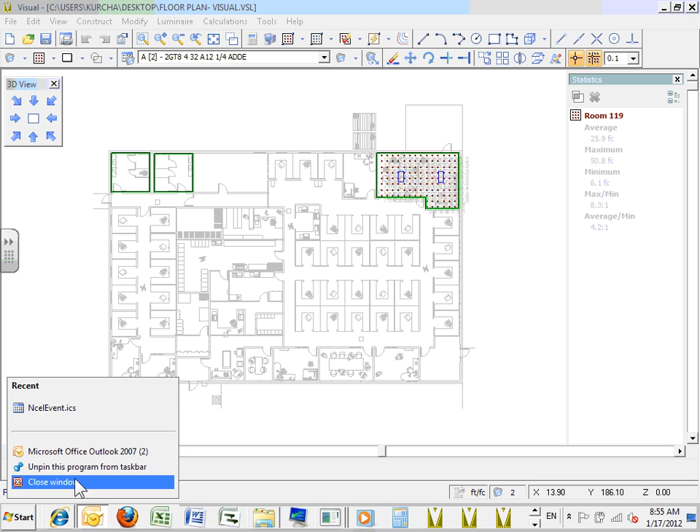So with this, Andrew, if you say a few things about Davis and Associates, go ahead and start. Yeah, we're a manufacturer's lighting representative. So when people are designing these jobs, we have guys that'll go out to engineers and other specifiers. They specify a product and it ends up on these jobs. I've been working there for like 5 years, mainly just doing visuals. So it kind of gets a little dry. But we got salesmen, we got guys that pull jobs, and we got guys that do what I do. And then next week Jeff will talk to you guys about lighting controls, and that should be a little better. This will be kind of dry.

Are you considered a lighting distributor or supplier? We're a representative, and then we have distribution, like your Border States, your Graybar. Oh, you're a manufacturer's representative? How long has Davis been in business? I think he started it in '69. He started out by himself, our boss, and then grew it over the years, and now we've got like 20 some people. Are you guys in Eden Prairie? Right down on Flying Cloud.

It sounds like you guys already got a pretty good head start on this. You guys have all your rooms done already? No? Yes? Some of them. I guess, Chad, you wanted to look at doing a Lumen method on a bathroom? Yeah, if we can take the bathroom and do a Lumen method. Sure. As I told you guys, there's a much easier way. If you have a floor plan, you can just draw the room like you did and add the calc zone like you did in your lunchroom. But the Lumen method is more for if you don't have a floor plan and I'm calcing a bunch of 30 by 30 classrooms. I could use that, and it's just under tools, interior lighting.

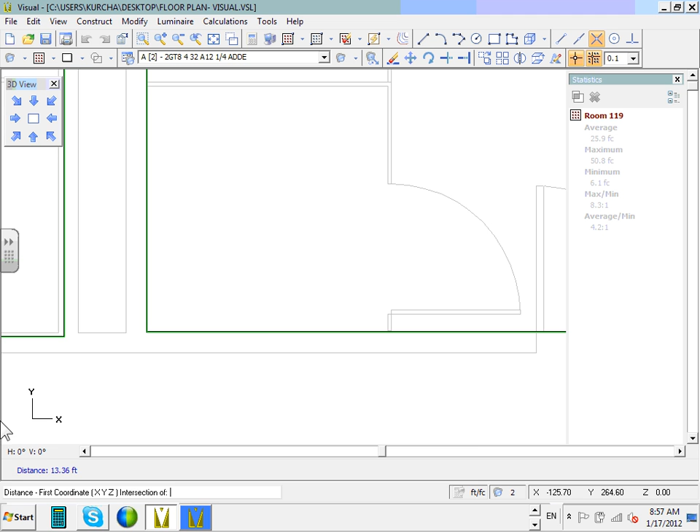Well, hold on. I'm gonna grab the dimensions of your bathroom here. Yeah, for Lumen method, you need to know the dimensions of the room. Can you slow down when you get the dimension so we can follow? Yeah. I just hit Shift D, and that gives you a tool to check your dimension. So we got 13.36 that way by 13.5.

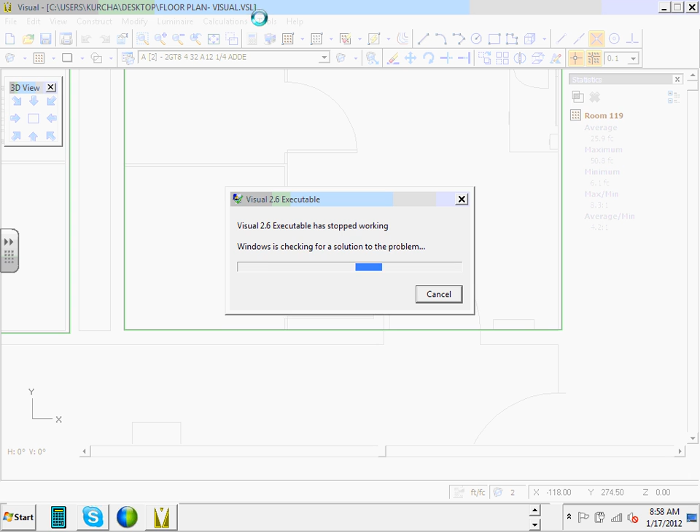So then we can go up to this. It's going to be kind of different for you. Oh, it's right here. Uh-oh. Yeah, I think that's what was going on. Did you do anything? What are we doing so far? Cancel. Just cancel everything out. It's right there. Okay. We're going to try that again.

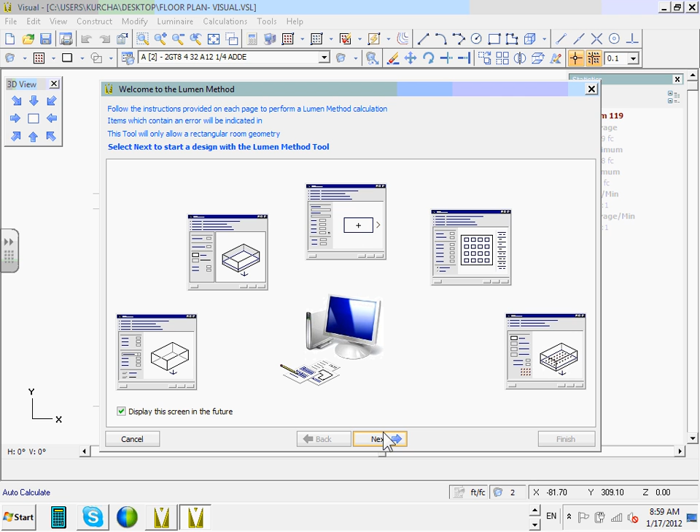And if you guys look at where Andrew went, there's Tools, Distance. That's where you pick up the distance if you don't want to use Shift D. All you need is the length and the width of your room, and the height, before you start this. So if you can share what you had with them. The height will just be 10. I took the distance, I had like 13.3 by 13.5. So then you just come in here.

This is helpful if you're doing a school or something, where you got a bunch of rooms that are all the same size, and you just want to draw one, and then you could just copy it rather than drawing 30 rooms. So go under Tools, and then it says Interior Lighting. Right there.

Guys, yeah, right there. When you do the Lumen method, can I say just this little thing? When you do the Lumen method, it opens two windows for you at the bottom here. Be very careful, a lot of disciplines get confused. When you hit the Lumen method, it opens another window right here at the bottom, and you have to click on it in order to get the Lumen method. You see, well, I don't see anything, because you have to click on another icon right here to get you the Lumen method. That's a very common mistake.

Where is it, Chad? Okay? Everybody get that one? Can I have thumbs up, thumbs down? Up there in the back? Cool? Okay. So the dimension that we're going to use is 13.3 and 13.5. This is the bathroom. And the height is 10. Height's 10? Yeah. So you get your 10 there.

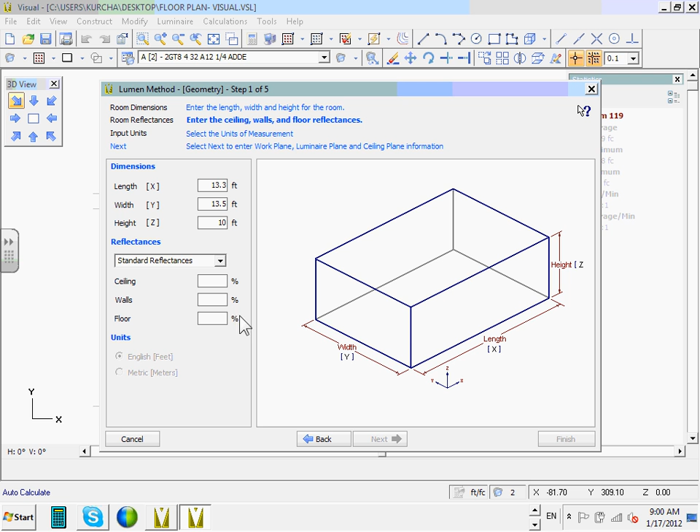And then down here, you're going to have reflectances. So we'll just use a standard. They have commercial, light industrial, heavy industrial. Kind of like a dirty warehouse that has big machines running, you're obviously going to use the heavy. Commercial would be, I guess, kind of like this. You got white walls, white ceiling. That would be your more typical. You can enter in your own values too if you want.

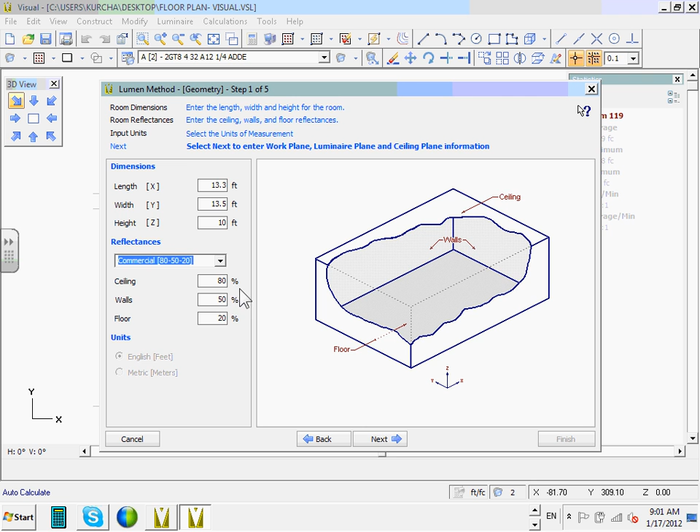Everybody's at this point, guys, before we go further? Yes? Are you guys there? Ashley, you guys are good? Dustin? Okay.

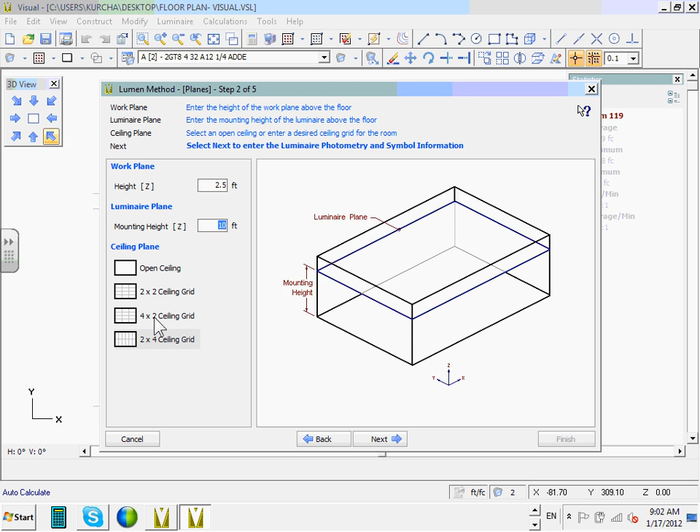We usually always measure at 30 inches. That's about where your desk is. So you're just going to leave that at 2.5 feet, your work plane. 2.5 feet, 30 inches. Mounting height. This gives you the option of mounting height here. We're going to be using a recessed fixture, I'm assuming. Yep. So if you were using a hanging fixture, we'd enter a different value here. If you want, you can add a grid to it. You don't have to. It just kind of makes your drawing more cluttered. I like to just leave it open.

So this will be the fun part. We identified the fixture for you, so we know exactly what fixture it is. This is bathroom 13, is it? 13 and 14? Yep. Page 36. Page 36, here's the fixture that we're using right here. So this is page 36, guys, the fixture that we're going to be using. You have the manual, guys, page 36. It's a recessed Lithonia, right?

Yep, it's a Lithonia. Okay, if I can have your attention, guys, for one second. When you click on this little icon that my friend Andrew is going to click on, this will take you to the IES file, exactly like when we were loading fixtures. Remember how we loaded the fixture? If you click on it, it takes you all the way back to the last location that you were in. So you're going to go back a little bit to Acuity Brands. Okay, so everybody's at Acuity Brands, guys.

And then from there, it's a Lithonia fixture. We'll go to Lithonia. Commercial, industrial, fluorescent, I believe. Yeah, that'd be correct. And these are all, you guys have to read it, from the catalog book that we have. Okay? And it's going to be recessed. On the side, it says recessed. I walked them through how to read it from here. So, recessed. Everybody's there, guys, to get that fixture.

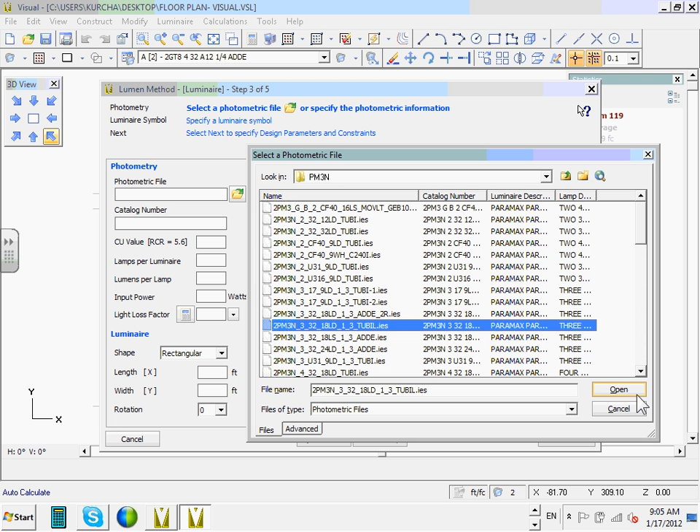And what I told them, Andrew, is just follow the catalog number here if you don't want to mess around with the type of fixture and so forth. Just use the example. Okay, so we're going to use a 3 lamp, it looks like. So from there, you guys use the same example in Lithonia. If you don't have the Lithonia book open, you have an example of a catalog number for you. It gives you an example, that's going to be the most basic common denominator fixture. If you can enlarge it for them so they can see it. This thing here. Yeah, drag it, there you go.

It's page 36 in the book, guys. 1, 2, 3, 4, 5, 6, 7, 8, 9, 10, the 11th from the top. That helps, right? Almost, it's a 2PM3, 3 lamps, 32 watt T8 lamp, typical.

Thumbs up, everybody there? If you made the wrong one, you can correct it anytime, guys. Anybody need help? We'll wait a few seconds. Do you mind, Andrew? Yeah, we use it all the time, so we're fast. Anybody need help to identify a fixture? I can help you.

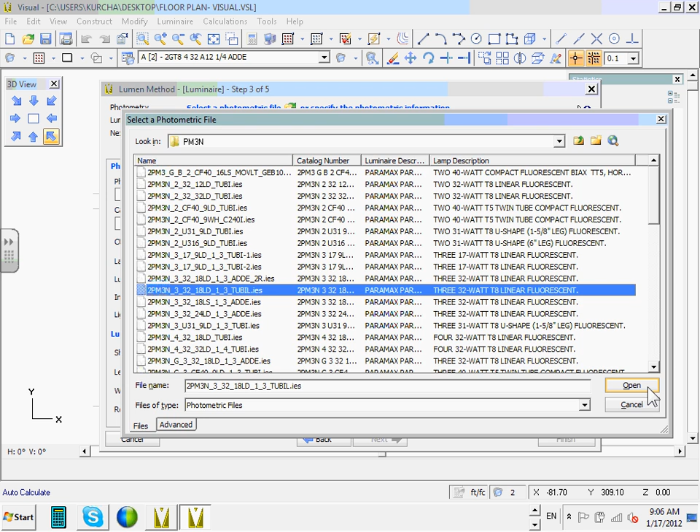You guys got it? If you've got the wrong one, don't worry about it, we can change it at any time. That fixture, okay, load the IES file, we're gonna open that, and it brings it in here.

So what you have done, when we did the lighting schedule and pulled the IES file into the schedule, that step takes the place of pulling the IES file into the schedule. Now you have a fixture with the data inside, and it'll be on your schedule now too.

So you've got to assign a light loss factor. We assigned 0.81 for the fluorescent. That's a good number, let's just use 0.81. Everybody got the 0.81 for the light loss factor?

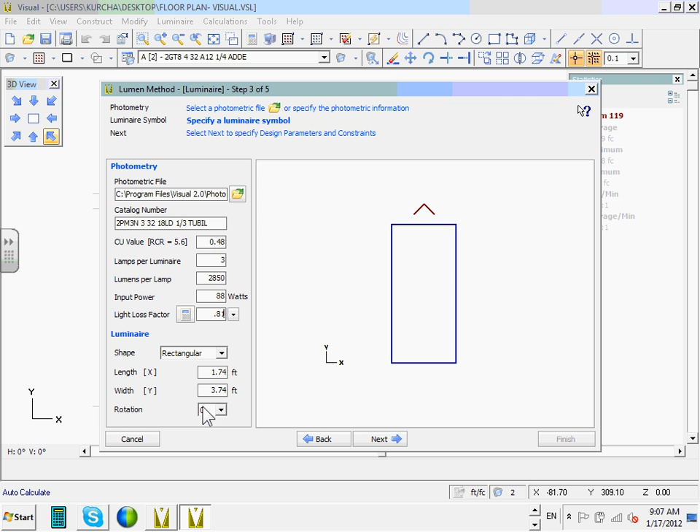Do you guys remember on the schedule we picked up the light loss factor? And I know, Phil, you had one and you got so much foot candle. We might have to come back and change our rotation, it shouldn't make too big a difference. But once you hit next, so we were there, just hit next.

It'll bring you to this here. The foot candle is given for the bathroom, 20 foot candles for restroom 113, 114. So you just type in 20 here.

Now it's going to give you 1, which I guess that's okay. It's probably going to want to use 2 in your bathroom just because you've got stalls and you want to be able to see what you're doing in there. But we'll go with 1 just for the study here.

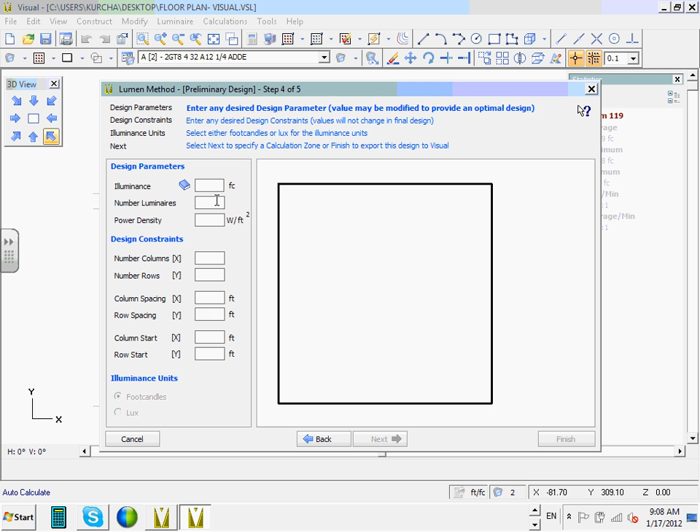Fill out anything on the left before you? No, what you can do here is either type in a value for 20, or if I know I'm going to use 2 luminaires and I want to know what kind of levels that'll give me, I can just type in 2. That's to meet the code - if you have to meet an energy code, you can type in a power density and it'll tell you how many of that fixture you can use to still be within the means.

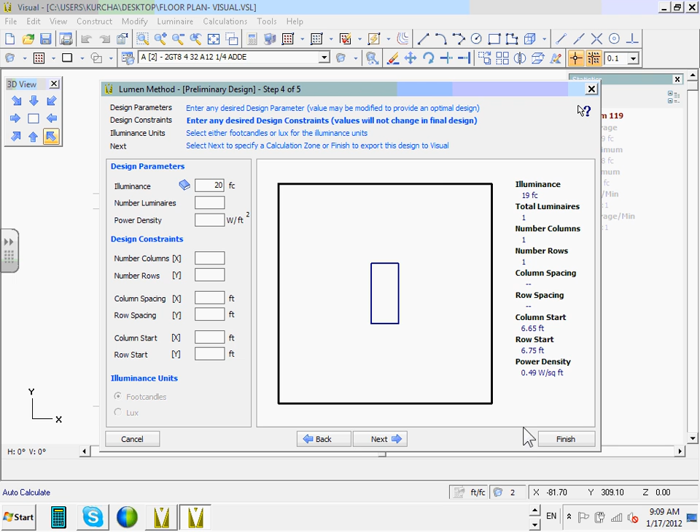We'll just use 20, we'll just use 1 and go to next. Then it gives you the option of making a calc zone, which the only thing I don't like is it doesn't let you label it in here, so it's just going to say calc zone number whatever. But 2 by 2 is going to be your spacing - that's putting a point every 2 feet, and that's where they're taking readings.

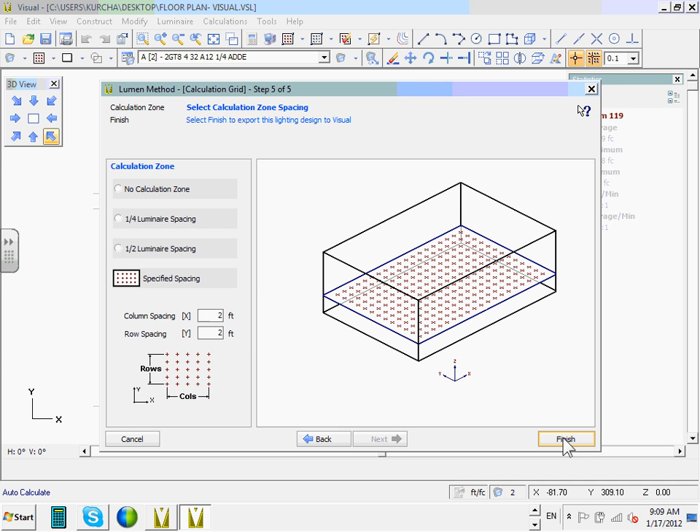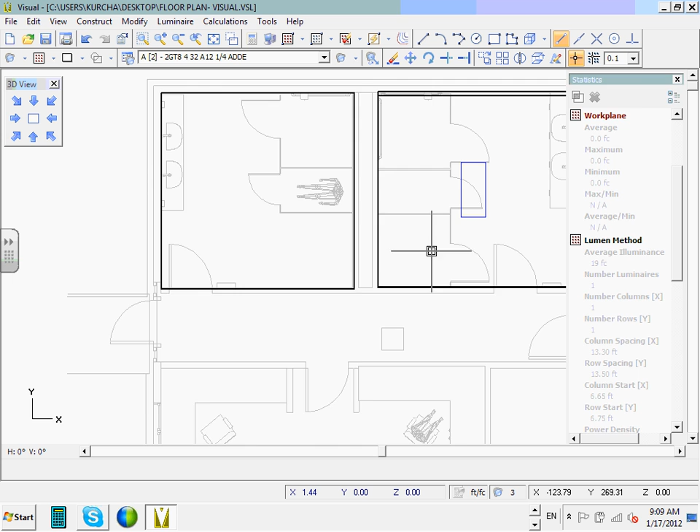And then from here you can hit finish. You can see it, he's holding it in his hand - that's the calculation you've done. You just go drop it right to the top. I'm just going to turn my endpoint on so I can select this corner down here, and then you've got to click again, right or left - just 2 left clicks. Just click once in the corner and then make sure it doesn't rotate on you, and then it should be good.

So you can lay the Lumen method - well, right now we did the foot candle method, where we did the Lumen, and then you got to add this calc zone separately. That way's probably more practical when you have a floor plan.

Sometimes you won't have a floor plan, you just get dimensions, and that's where I use that a little more. Or like I say, if I had 30 classrooms all the same size, I could draw one. So you're kind of doing more test areas with fixtures inside, different fixtures. Exactly, it's just kind of a way to see what you're going to need to meet all these levels you guys have to do.

Andrew, can you copy room spaces? Let's say we've got this bathroom here. I think they're the same size. You just right click here, it's copy. You gotta select the whole thing like that, and it'll copy the whole entire thing, and then you can bring it over and copy it. The only thing is when you start doing that, it just does this - you'll have a hard time knowing which area is what.

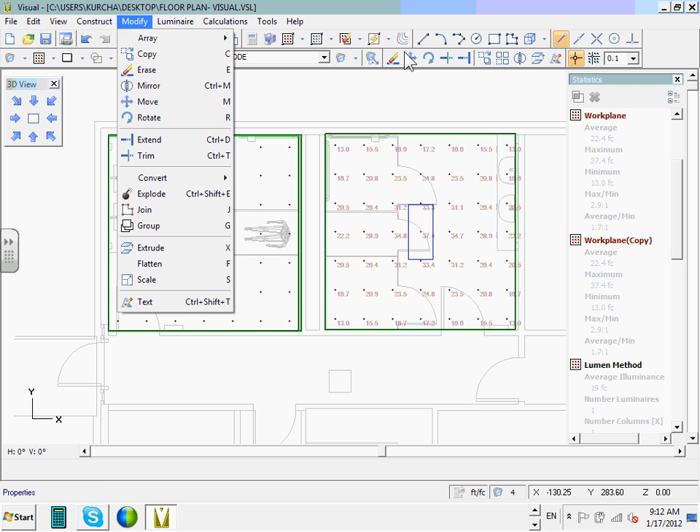I'll get rid of this one just for no confusion. Feel free to leave the other box too, so we can calculate it. Doesn't matter either way.

We're gonna go to edit properties and just select a point - just left click on any point here. It'll turn red, and then if you just right click, it'll open up a menu here.

If we do this for every room, they're all just gonna say work plane - it's gonna be really confusing. Now, I don't know, this is bathroom, probably 114. What's the female one? You guys have them printed here? The one that you did is bathroom 114. Okay, you guys see what my friend Andrew's doing?

When we drop that big box with calculation, the drawback of this method is it doesn't label the box or the calculation zone. So what you need to do when you drop it is go to the property, pick the calculation zone, right click on it and name it, so you can see which calculation zone you're talking about.

And the same thing with the solid, right Andrew? You can pick it and name the solid. That's not as important as naming your calc zone, but I asked them to do it. Yeah, that does it when you draw it, but we can go back and label that if we wanted to.

Okay, so we did - what'd you say, 114? You see what Andrew did? Pick the calculation zone and rename it. What he did is the property that we did here. Picked it up - I wasn't sure.

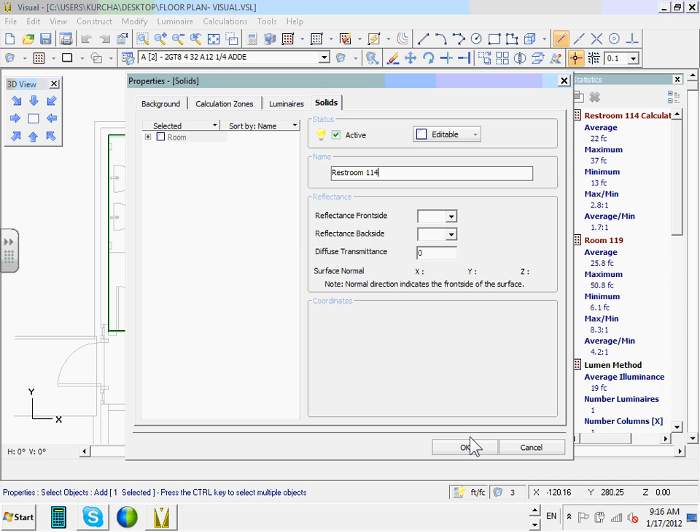Now can you guys give me a thumbs up that everybody was able to drop that box Andrew did and rename the calculation zone and the solid? Can I have thumbs up, thumbs down, Ashley, Jackson, my friend? The solid, same thing - go property, select solid, right click on it, it says room, name that room as bathroom 114, hit OK. Now the solid, the box, and the calculation zone have the same name. Cool - one thing about the granularity of the calculation...

It's 2 by 2. You can also change that if you go to edit properties and just select one of these points. Then right click, and it tells you your row spacing and column spacing. What does yours say? You can change it there. Good, 2 by 2 will be fine.

My friend, you guys are good? Yeah. And Dustin, I lost my wheel. It was working earlier though. Oh, let's see if it's in options.

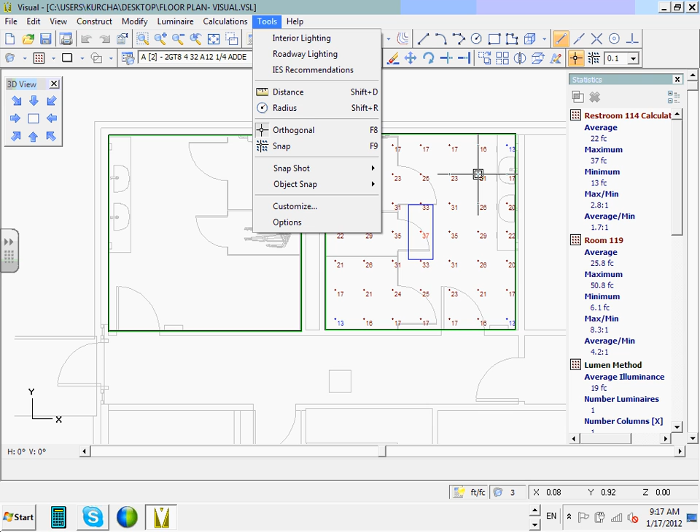There's no fixture. You just need to copy this fixture and drop it on the other side. Come in, go to tools, and then options. You got this window here, just click on the drawing aids tab.

Are all 3 of those boxes checked, like on here? Does it work? Does it? Awesome.

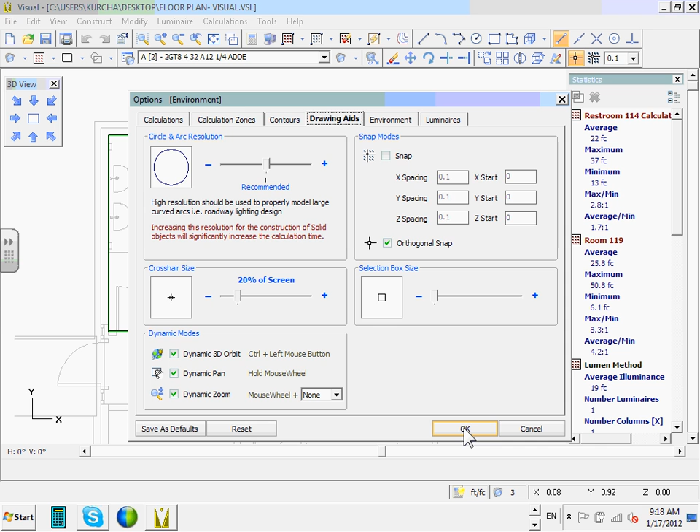And when I changed it, it shrunk to a 2 by 2, and a bunch of 2 by 2s with a big wide space around the outside. Maybe your box was smaller than that.

Any question, guys? Everybody drop that one? Can I get thumbs up, guys? Right? This is so easy.

If you have a square or rectangle, you can choose the dimension, go grab it, drop it. But when you drop it, the first thing you do is rename the calculation zone and the solid, and you're done. Now, if your area is not a complete square, then you have to use your memory.

Oh okay, that's easy, very easy, very fast. And that makes it go faster. Only if it's square or close to square, for example, see that room there? I can ignore that little room. And then all the room, for example, if you look at this room here, the kitchen, you can ignore that little room here, right?

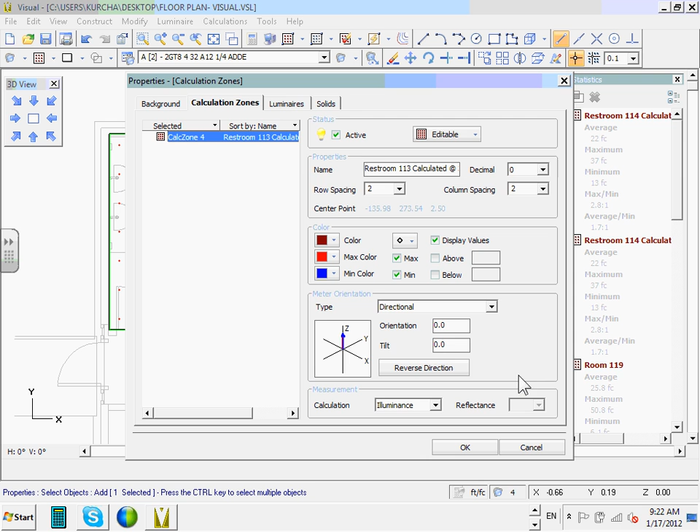Call it male bathroom. I'm just calling this one 113. Absolutely, yeah. So that will expedite the process for you, instead of, if the two rooms are the same fixture, the same dimension, the same calculation, there's no need to redo them. You just copy and paste it.

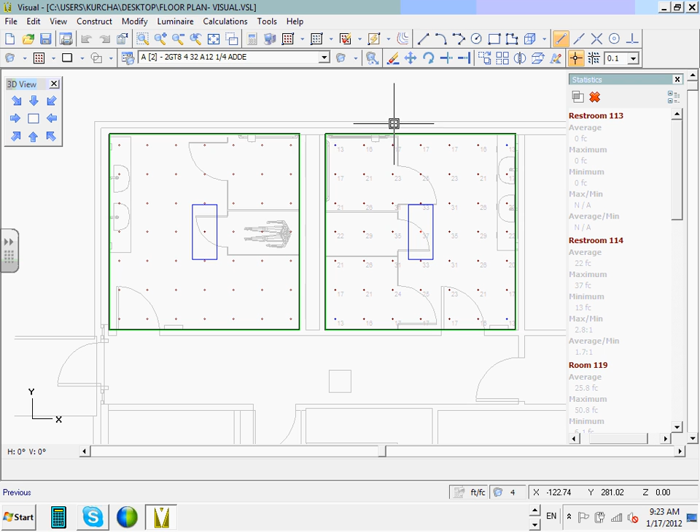So will it copy the calculation as well, or do you have to do a recalculation? It'll copy it, but anytime you move something, all your points are going to go back to nothing. So you have to recalculate every time you move a fixture, draw a new room, or copy one. Can you hit that again? Did you guys hear Andrew? Every time you move something in the system, you have to recalculate to get the numbers. That's okay.

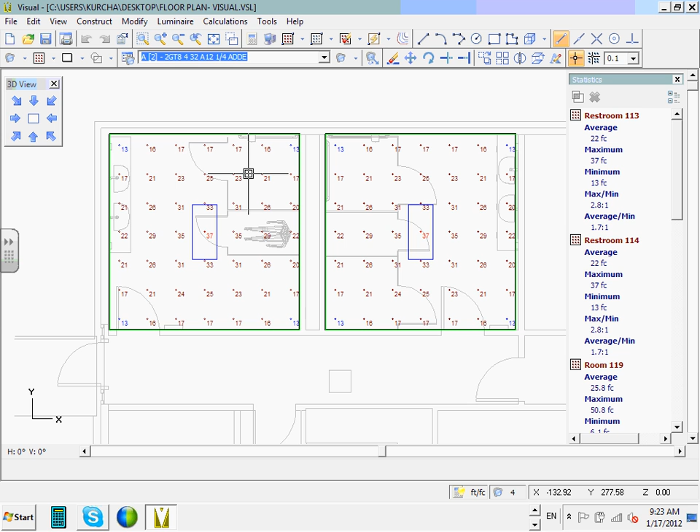Any questions, guys, about using the Lumen method to get a box, a calculation zone, and a fixture, and then drop it right at the top of where you need it to be, and then copy it if you have an identical location like it? So we can use another office, just to show something different.

Well, when we did the Lumen method, the fixture we selected will automatically be put in your schedule. It labels it LM-1. If we do another Lumen method, it's going to label that fixture LM-2. If you want to rename this fixture, it will matter for the lighting schedule, because your lighting schedule is going to label alphabetically A, B, C, D. So we'll just label it B for now. Yeah.

Okay. So you want to look at a different room? There's one in the conference room, with direct and indirect light and all this good stuff. Maybe after we do the room box. This here? Yep. I can help you with that one. This is the conference room. 123 or 125? It's actually conference room 123, and page 230.

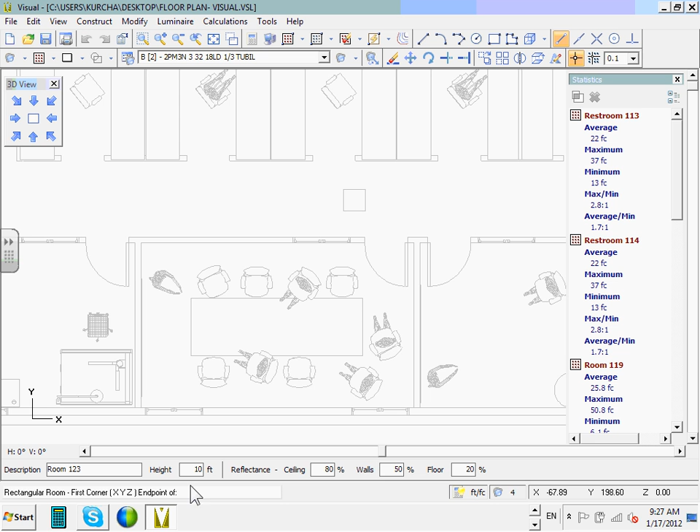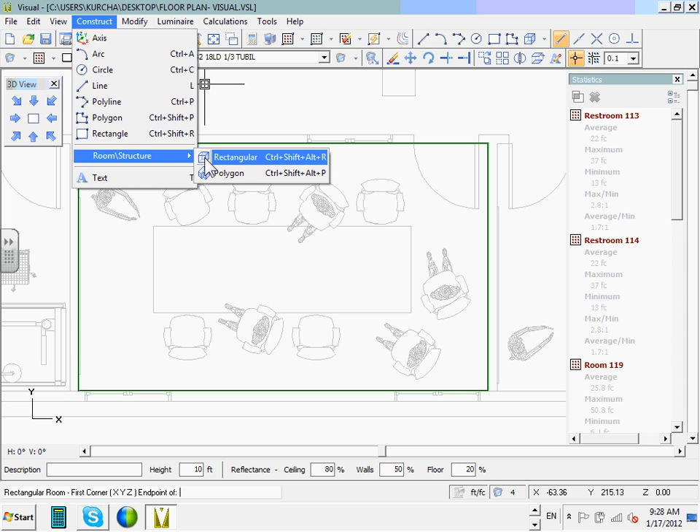And we got our room. Everybody needs help, guys? Construct a room and name it room 123 or conference room 123. You're naming it, do you have to name it before you highlight it or after? Doesn't matter. Just once you come in here and select rectangular, okay, you can name it now. And then you can either click on the screen and it'll give you your cursor back, or you can click in here.

Everybody has a room, guys, right? Phil and Rob, you guys are good? Jackson, you have a room? And named it conference, Ashley? Justin? Chris? You work on that?

Okay. So now we got to add this fixture we're going to use to our schedule. So come into your schedule. The fixture that we're using, I don't know if you can tell them the page number. Yeah, the next fixture you're using is on page 176. 176, guys. So we're gonna come back to Acuity Brands Lighting again. And it's different here. Okay.

And this fixture on 176 is a Peerless. Everybody got that one, guys? It's different than the other one. It's a different manufacturer, right? Yep. Peerless lighting. No, we're doing the regular one. Number 5. This is the Sarah 7. And you're supposed to use a direct indirect. So we're going to try to use the 7 CRM3, which, if you're on the page, you can see it's the third one down. It's got a little bit of direct light.

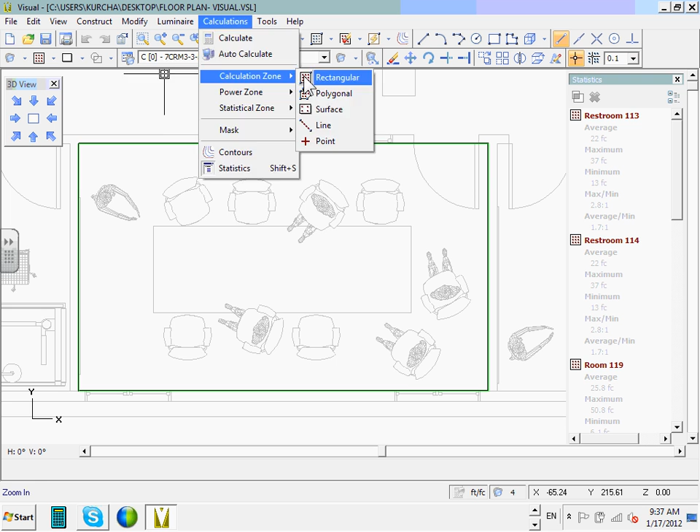We need to add a calc zone to this room after you get your fixture in here. And we'll do a rectangular. So now we can name it. This is conference room 123. And you'll have to put in 2.5 there. So it'll put it at 30 inches.

Select each corner and leave it on there, instead of 2 by 2. Or you want 2 by 2 where it says height, or 2.5 where it said height there on your calculation. So you got 2.5 on the height. And then your row spacing and column spacing will be 2.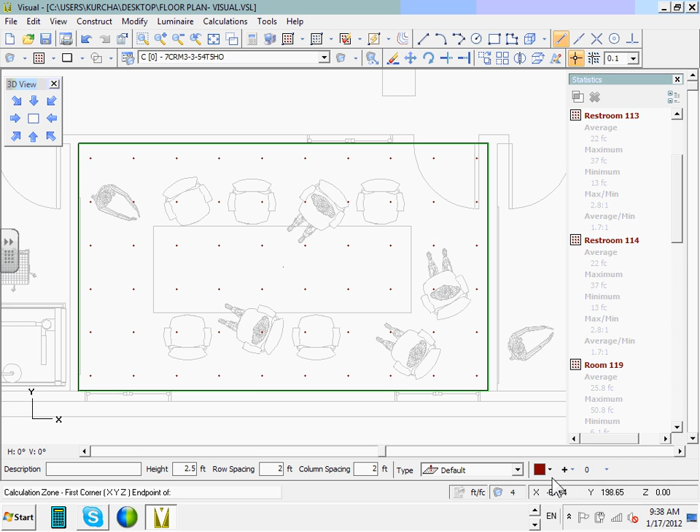If you guys notice what Andrew did is he used a calculation zone. We use the surface because we have a surface. Either way will work perfect, guys. Either calculation zone or surface, and it works. That's fine. Just preference. Yep.

Absolutely. And then we gotta place our fixtures in here now. We'll use a 24-inch suspension, so we'll put this fixture at 8 feet since we have a 10-foot ceiling. We need to rotate that fixture so it goes with the table. I'm assuming that's the way you want it. Turn that off. And center it over the table best you can. And then looks like we'll copy 3 of these.

You can see you got it on your schedule. You hit that drop down, and then you can select A, B, or C. And then there's a little button right next to where that drop down was. I don't know what it looks like. Blue dot. And that'll let you place it. And you have to change your mounting height to 8. Turn it 90 degrees.

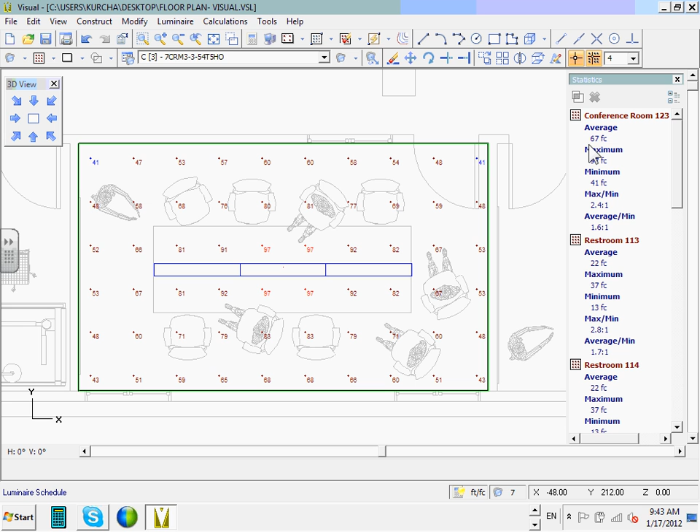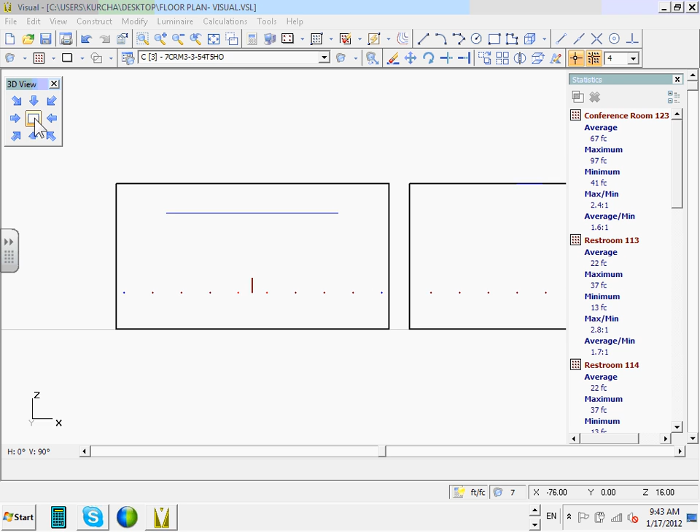Any question, guys, about direct? Make sure the fixtures that you have done are mounted at 8 foot. So if you go property and check the height, you can zoom box them all in. Right click. And then the height, yep, mounting height is 8. Make sure their mounting height is 8 because the ceiling is 10, so the direct light shoots up and down. What happened in the past, people will mount them at 10. Then you don't get a whole lot of light.

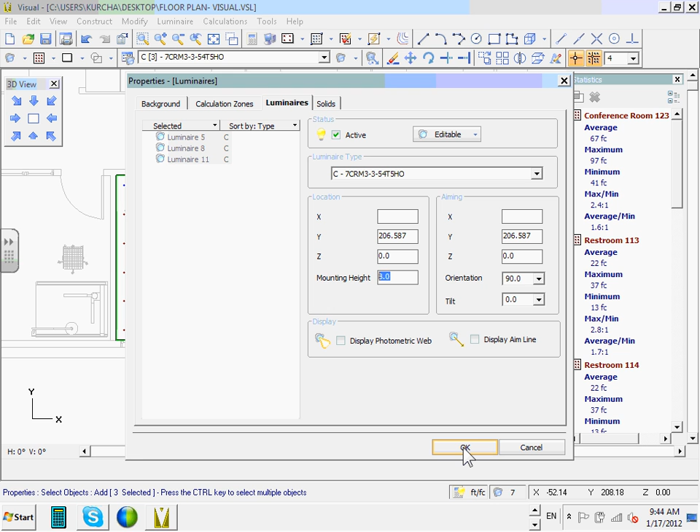It's not calculating because it's indirect light, and you're shooting up and above the suspended ceiling. The mounting height is it. If you drop them, no problem. You can go to property and correct, and you can change your height to whatever you want it to be. So not a big deal if you drop them at 10. Chris, can I help you? You will go property, you will check. Okay. Yeah, calculate it. Any question, guys?

What's our average for that one? 67. An average that we're asking for? We're looking for 50. Okay. Could you use the two? Probably would have got it, especially when we're gonna have this other lighting in there. You're right. I don't know if we want to change that or if it'd just confuse people. I think we'll get into that one if we can do the side. Hold your horses.

Guys, do you see what Andrew did? Everybody got 67 average or something similar. What's your average? Hit calculate. 57. You guys got 57. Anybody got something different? Calculate. Okay, where are we here? 46 average. Is that the one, 123 conference? Average 46, and we're asking for 50? Okay. Yeah, 46 is probably where you want to be, just because we're gonna add a little more lighting.

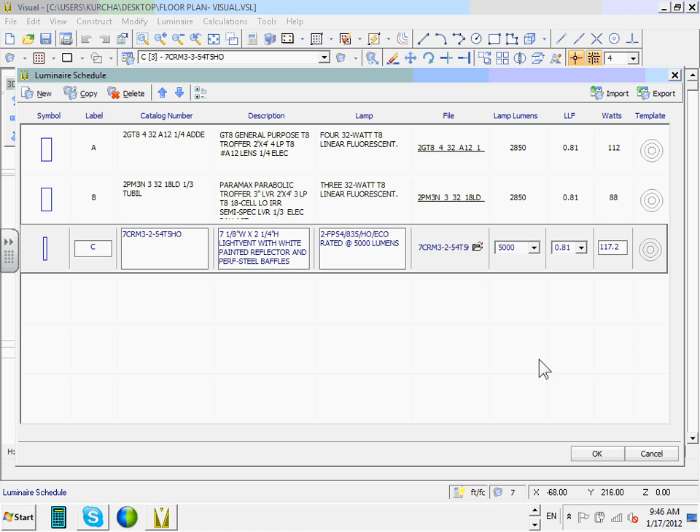But did you use the 3 lamp or the 2? There's a 3 in there somewhere, there's also a 2, a 5, and a 4. It'll say 7 CRM 3 is the fixture, then it'll say 3, which is your lamps, and then it'll say 54 for the watt. He's using 2. Two's what I'd probably want to use, just because you're gonna add that other lighting in there. I used the same one that you had quoted. It's this one here you used, I think.

And then let's just see what I get for a number, see if it matches yours. 46? I think you said you had 47? I had 46 and some change, so yeah, we're right where we want to be. You got good lighting on your table.

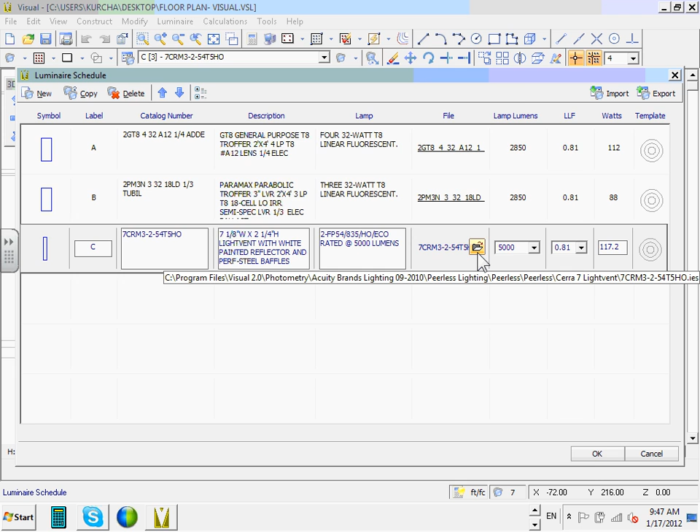Did you guys get what Andrew did? Instead of the 3 lamps that gave you a 67, you go back again to the same fixture and change it to 2 lamps. So you come in here and do that one. If you go to the schedule, click on that little IES file, and just pick the 2 lamps. Change it to 2 amperes instead of 3 lamps. Anybody need help to change it to 2 lamps? And then hit the calculation.

Any question guys about the direct, indirect light in the conference room? I will warn you guys, when you say direct and indirect light, you'll have to suspend these babies. Is it really? Okay. Now what happened? Did it work? A little lower? Because of the reflection, guys, the type of fixture they can use and the dimension.

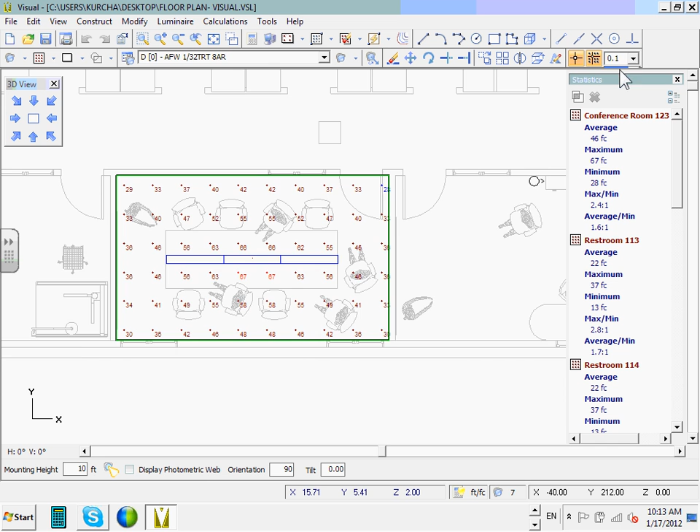How many are you going to put in here, just one or two? I think at least two is probably best. I don't know which way is easier—you want to be about 3 feet off the wall with wall wash fixtures, it's just good practice. So I'm going to put the center of the fixture on there, and then move it back.

We'll use 2.5, just because of the shape of our room.

Are you looking at the X? Yeah, when I move that, I just selected move, and then clicked center of my fixture. Then if you watch down here, when I move, my X will change. Can you guys see where the X is at the feet, right at the bottom? Let's move that. You drop it on the wall and move it, and it will tell you how far you're moving. You need to orient it to...

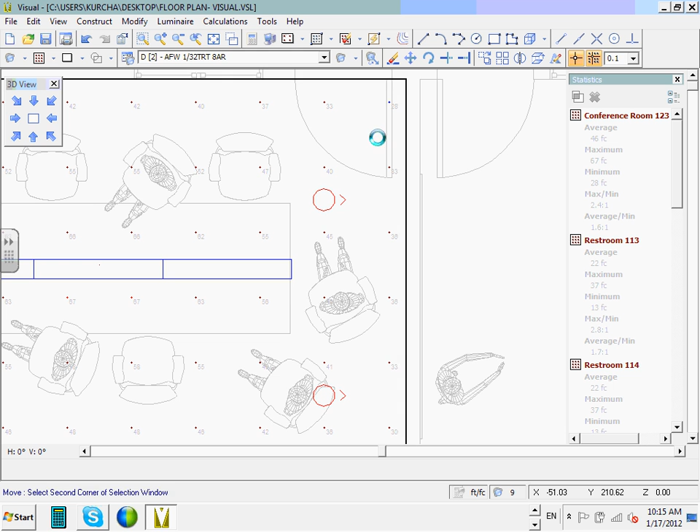The way it moves the fixture, yeah, we just move it, yes, pick it up, like that - the wall wash fixture here. So when I placed it, I just kind of set it on the wall here, because I want the center of the fixture, so I just placed it there, and all I did was selected move, and then I put 0.1 over here.

You could use a point - just make it 0.25, then go back again, and selected that because that's what I'm gonna move. Select in the middle of the circle, just grab the middle of that, and you see, like right down here, this is X. I just moved it back 2.5 feet from the wall, so 2.5 on that X, and then drop it there. Then I just copied another one 6 feet down.

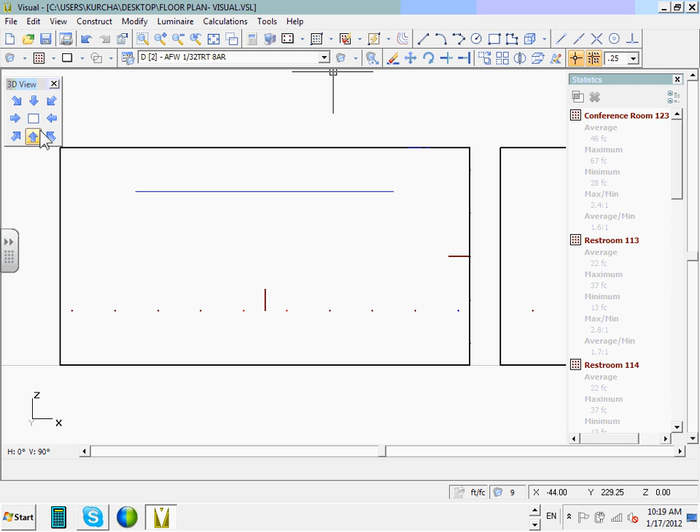Okay, and then right click, and you've got your calculation all on the wall. Okay, you're gonna go calculation... yeah. Calculation surface. Yep, and click that here.

Yep, perfect. And right, one second - what do you do, you name it right here. Name it room 123 east wall, because it will be west wall, east wall, and make sure the height of the calculation zone is 0. Perfect. Okay, 0, there you go.

And then click, click anywhere. Yep, and right click. Perfect. You got the calculation. If you would, edit it, put the name on that. Okay, east wall, that's easy. And you can edit.

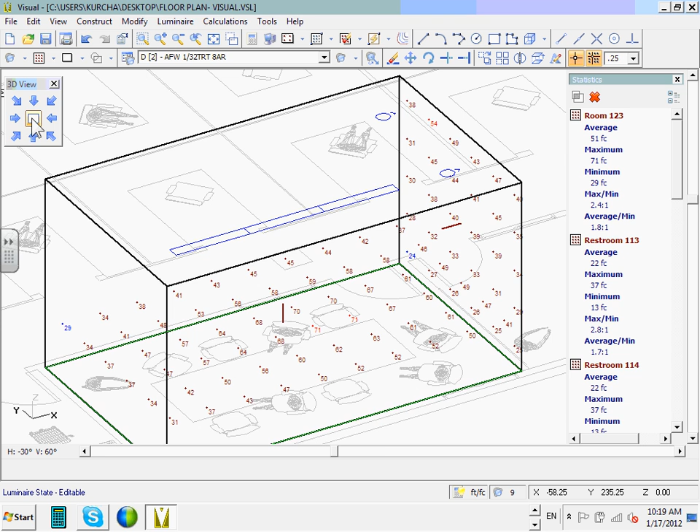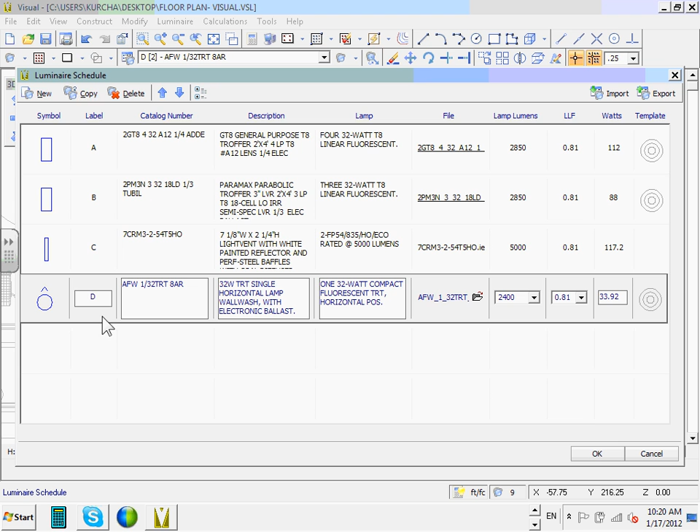And if you get there, you got another fixture on the other wall - we're gonna do the same thing. The next fixture was on page 252. It's hard when you have multiple things.

Yeah, that's the hardest thing when you have multiple zones going. Once you do the calculation, we'll name it. Yeah, do the calculation now.

For your next one, we're gonna do the same thing, just on the west wall. Go calculation. So on page 252, we're gonna put this other incandescent fixture. Looks like you're using that, so that's gonna be your AW. It's just a straight incandescent downlight, but if you put the W, then you get the wall wash.

Same thing, and then we're just gonna put that arrow on there. I labeled it F.

Yeah, you're gonna have to go back. Are you still in AFW? You'll have to go back to this screen here and select incandescent downlighting. Oh, incandescent though. Okay, thank you. And then from there, AW.

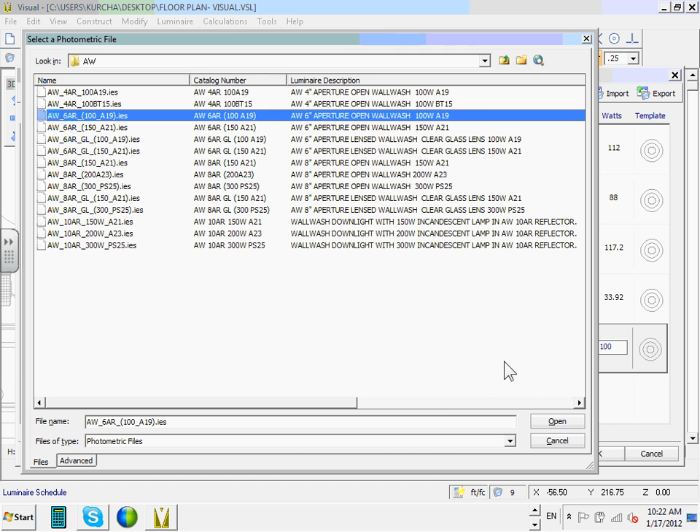I just used a 100 watt A19, even though you can buy those things differently. What do we use? We use an 8-inch, so let's use another 8-inch. Otherwise it'll look kind of goofy.

You pick, you select AW. Yep, for the next one, for the west side wall, we'll select AW, and then we'll use this 150 watt A21. Now I've got it on my schedule.

Can I edit it within the schedule, or do I just click the one that you had originally, which was the 6, and then you changed it? So I've got a schedule with a fixture F that is 6 inches and I wanna change it to 8.

Yeah, just grab this little folder again, and it should pop open, and you can grab the 8-inch. It's a second wall, you're in the second wall, we're just doing the opposite, the west wall.

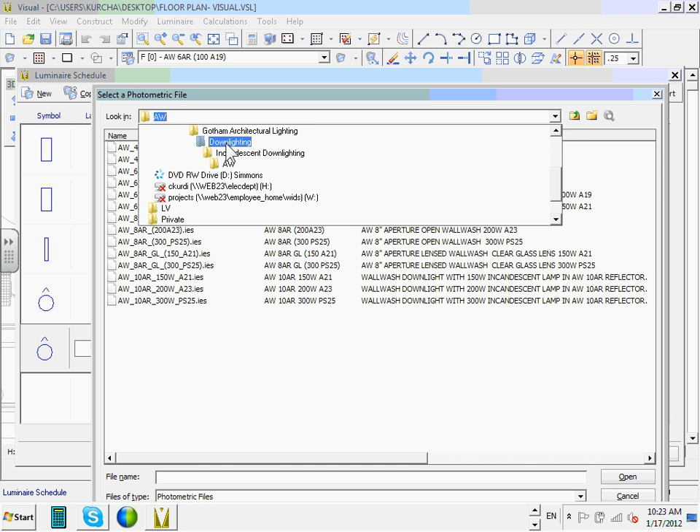Can you just review where you got that fixture? Just go back, yep, there you go. So I selected new, and we were still in downlighting, but this one's an incandescent, and it was an AW on page 252.

Based on the specification that we have, okay, and I selected another 8-inch because we used an 8-inch on one side, might as well make it symmetrical. And then hit open.

And I have this F. Okay. And do we wanna do anything with the orientation or arrow? You can come back over onto your symbol and click on that, and then on options, you can add your arrow.

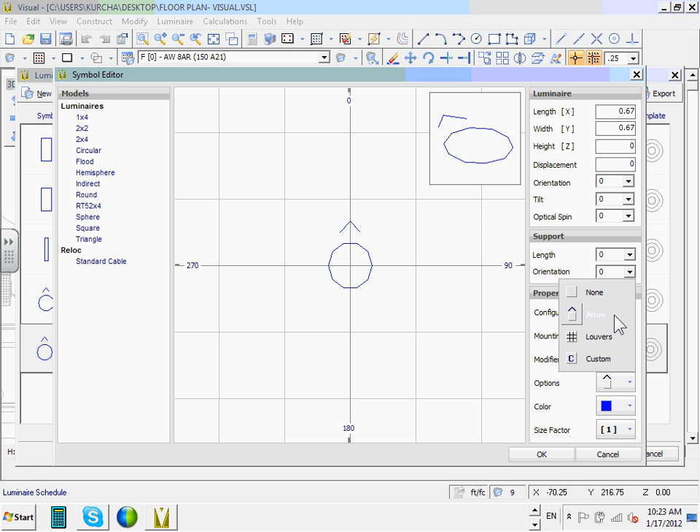And we can change the orientation too. Yep, you'll have to do that when you place it. So once we get out of our schedule, hit OK, and now we're gonna place this. We don't want it 90, we don't want it 180, we're gonna want 270. So we're gonna put 270 in there.

And we'll do the same thing again, we'll just put it on the wall. That's 6, so it takes the degree from a single reference point, it doesn't take it from where a fixture is. Okay, that's why we were getting issues. Move it again.

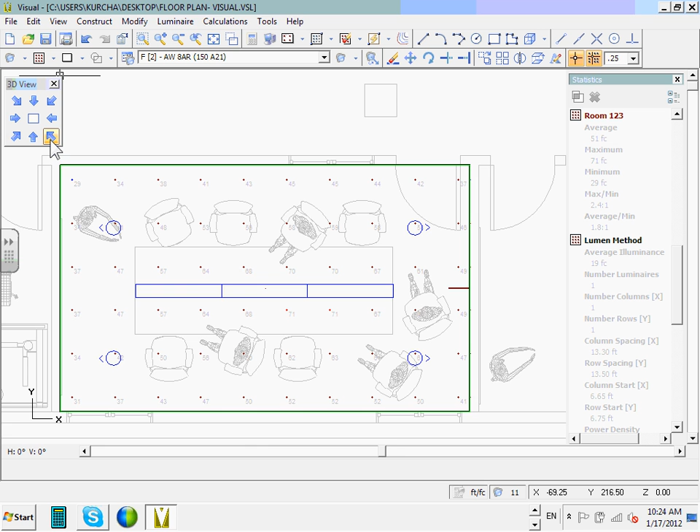Were you guys able to place a fixture with calculation zone in the west wall? And hit calculate, name it?

Okay, now we don't have a foot candle, average foot candle on the east and the west wall, guys. Just because, so you don't have to worry about what you usually get at this point anyway.

Well, what's the, where is this? For the whole room, ask for 50. 44 is good enough, because you would be 0.81, right? Yeah. Okay, you can go ahead and change the green amber, whatever you want the calculation to be, if you want to.

Any question guys about the wall wash in the east and west? The wall wash in the east and west. This is as ugly as it's gonna get.

Any question for Andrew before? I think we probably should do the parking lot, this width of a parking lot and perimeter line. Any question guys? If you zoom all on it, Andrew zoom the whole thing, I think he zoomed the whole building, yeah.

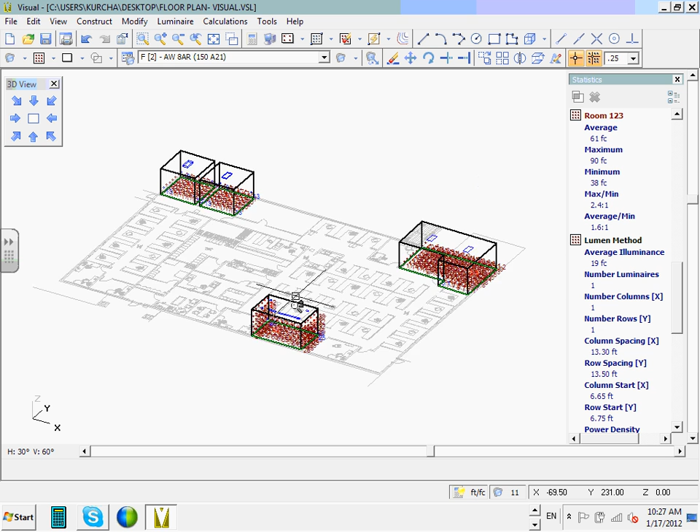Just want to draw it. Any question, guys, about anything in the floor plan, visual lighting? The rest is going to be repeating itself. That last one we did, I neglected to name it. What's the quickest way to? The wall, yeah, the calculation zone? If you can look at it and get into the southeast view, just so you can see these points.

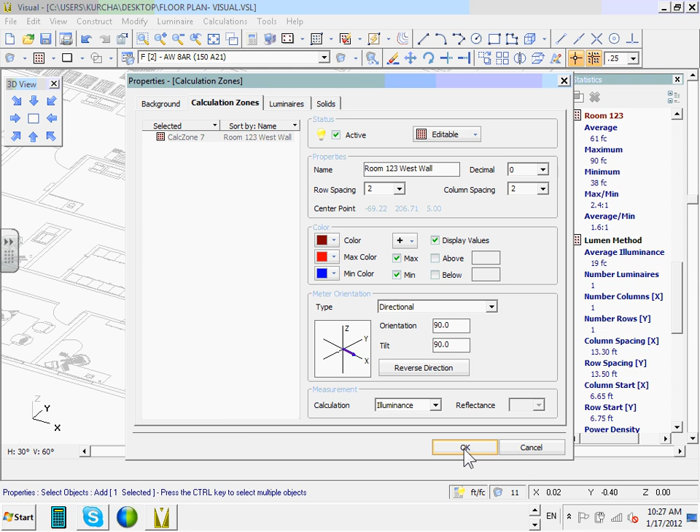Yeah, got that. If you just hit edit properties and just grab one of the points, it'll bring you in here and you can name it again. Right click. Yep, and it should open up that window. Any question guys about the floor plan? Any other tricks, Andrew, you wanna share with them for the floor plan before we move into the site? No, I think we should be good to go.

How to print from the software and how to design, I walked them through that one, that's not a big deal. You already went through all that? I did not, but when they reach it, we can do that. Okay. I would like to use your expertise in the parking lot. Sure. So you want me to say this? Yeah, please. Any question guys before we move into the outside file that we started? Remember how we did 2 files, one outside, one inside? Any question for Andrew while you were here?

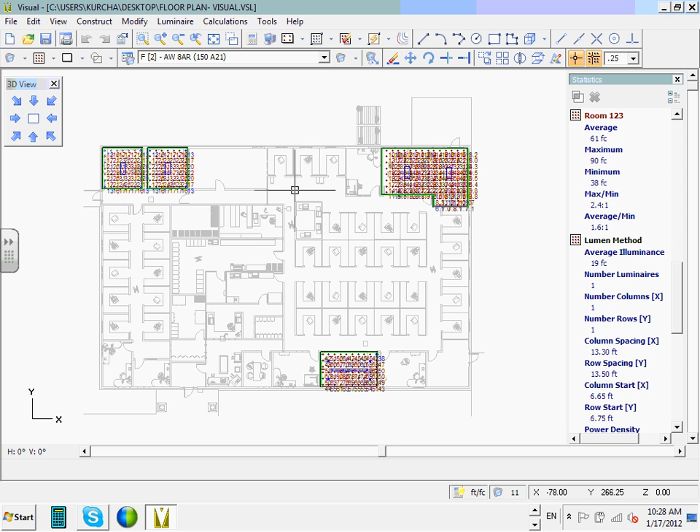Just one at a time as far as files? You're in one and you open another one. You can open as many as you want. Oh, okay. I don't see any close command. Yeah, that's exit the program. Close file, it doesn't appear there. No, you got to open the program every time you want to open a different file. You can't open, like AutoCAD where you could open 5 drawings and copy onto another one. Can't do that in this. I kind of wish you could because it would help on some things.

Now, Andrew, don't laugh at my layout here. No, it's good. There's a lot of fixtures here. The only thing that we're asking for is the average. There's a minimum of 1 foot candle for exit emergency. Parking lot, half foot candle, 0.5 minimum. Yeah, here you go. Half foot candle min, 4 to 1 max to min. And you're meeting all that. Maximum to minimum 4 to 1, I think we have 6.1.

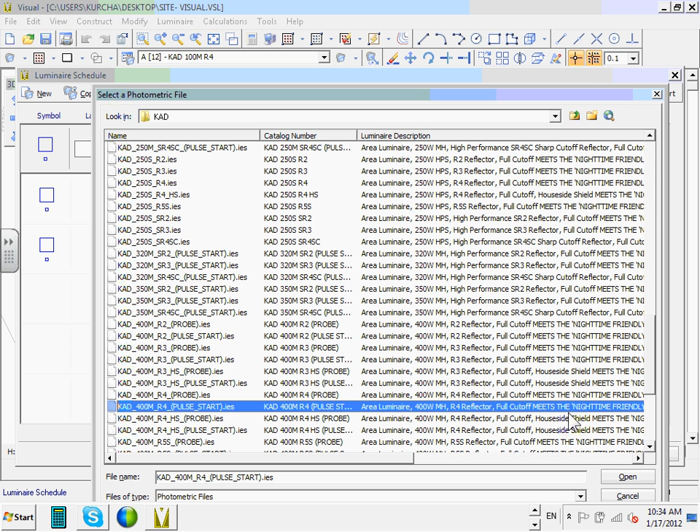We're just gonna grab that and see what it looks like. See, you could almost get rid of half your fixtures. Now I don't know if you want to. Well, we could get rid of those. We need to meet code, yes. Yep, you got to meet your code. You guys just had a 0.5 minimum and a 4-to-1 max to min. Let's just see if we take out half these fixtures. We're gonna be way over.

Well, yeah, right now with half those fixtures, half those poles, because the contractor's got to go out and put all these poles in. So what he's looking for is to have the least number of poles, because then he's got to do less wiring and have less labor on his job. But see, now we can probably get rid of... I don't know if we can get rid of that one.

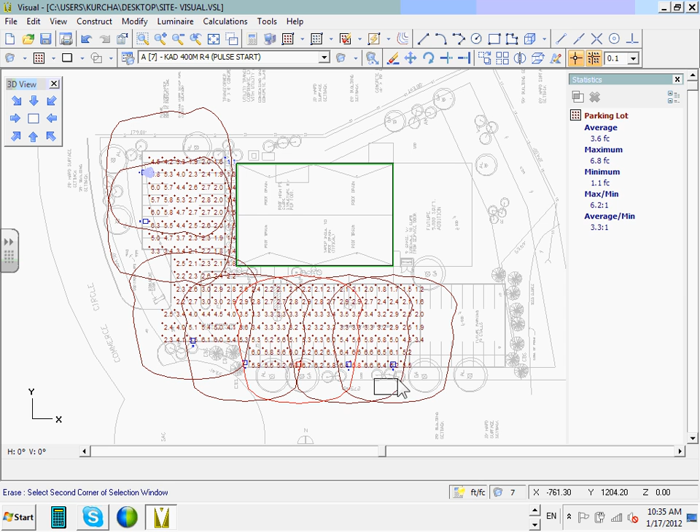Or maybe this one. So when you do the delete, if you just select all those points and then calculate, will it allow you to get rid of them? Yeah, if you just try to put your cursor right on where it looks like the pole. Oh, okay. And then if we move these down a little bit.

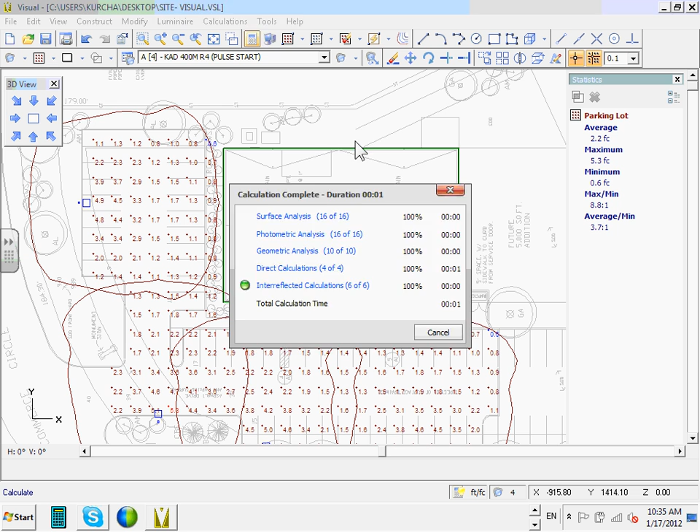How much would you price out a 400 watt at? I think they're roughly $400 just for the head. I don't know about the pole. Probably something like that. I don't work in the quotes department, but that'd be my best guess. So we're not meeting it. I want to be real close here. So there we go. Instead of having all those fixtures, you can get away with 4 poles, which makes somebody happy. Now, did you have to redo your calculation in there? Yep. I just had to click the calculator button.

Does everybody see there's a difference between a 100-watt fixture and a 400-watt fixture in terms of how many poles, how many fixtures? So between these 4, how many did we have before? Probably 12 or so. A lot. So that would probably be 20-30% of the price of the project. That's a big deal in terms of dollar value. Let's just open it again so we can compare. So you had 14 poles. 14 poles, 14 fixtures, down to 4 poles. So that will give you the price.

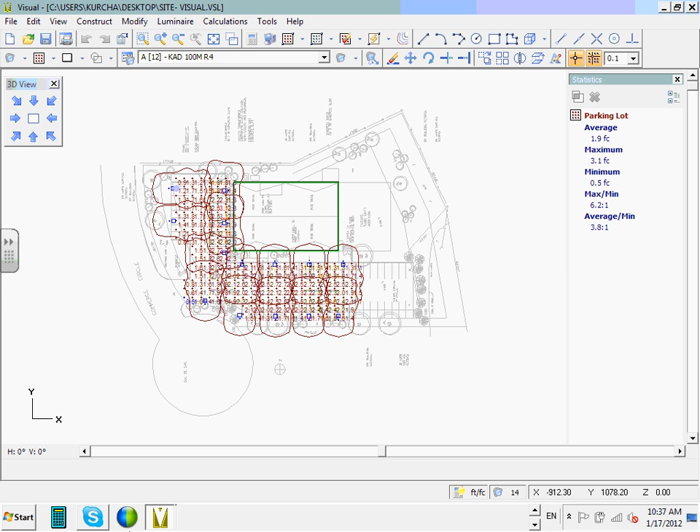But because we work for Davis and Associates, we want them to sell more fixtures. We didn't really save much energy because we had 1,400 watts, and now we have 1,600. Yeah. But the price of the installation, the wiring, and the pole and the base for the pole and all these good things, it adds up.

And while Andrew's there, most of the time we'll end up with 3 to 4 fixtures when we do the site. I want you guys to look at, you're gonna end up with 4 fixtures like this. This is not worth exporting that file back into CAD and importing it in Revit. It's not worth it. Why? Because we have 4 things to place in Revit. Is it worth going monkeying around?

What we've done in the site, especially the site, is see where the fixtures are located. We eyeball them here, and we go in Revit. We drop them exactly where the locations are. It's because there are only 4, maybe 5, maybe 3 to 5. That's what we end up doing. So it's not worth it. You can do it and import it to Revit, but for the site it's not worth it.

I'm telling you. So we're not going to export this to CAD and import it to Revit for the site. We're going to do this for the floor plan, because the floor plan has a lot of fixtures and a lot of layout. Everybody got that one? So when we do the export to CAD, import to Revit, we're not going to do the site. Everybody's okay with this? Just because it is so not worth monkeying around with it, right? It's a few fixtures.

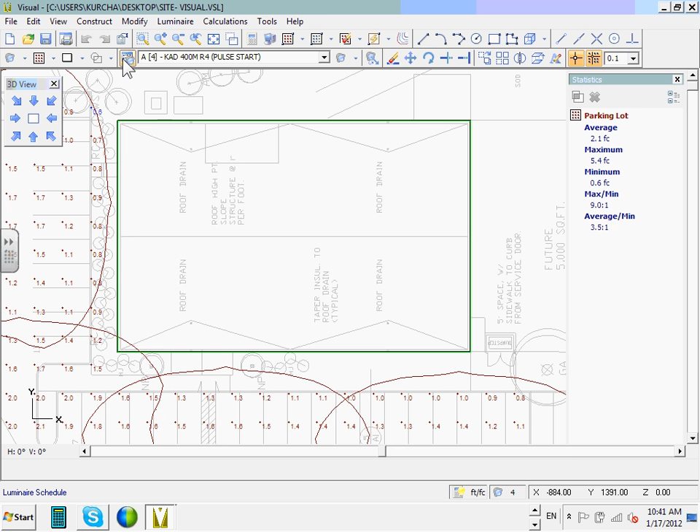What we're going to do, guys, is grab a perimeter light, a security light around the building, and do a calculation with it. This one is 544. And what is it? The manufacturer is Lithonia. It's Lithonia outdoor wall mounted. So we need to go to Lithonia outdoor wall mounted, right?

Yep, you're gonna go to Lithonia and then outdoor, and then it'll say area lighting. Or no, you're right, I'm wrong. So Lithonia outdoor, and then it'll say wall mounted. Wall mounted. Okay. Everybody get that one? Lithonia outdoor wall mounted.

If you guys are overwhelmed with the types of fixtures, you are completely right. It's a complete science. Andrew, my friend, spends 8 hours a day, 5 days a week, dealing with this software. It is overwhelming. There's so many fixtures, so many manufacturers, so many variables. There are people who are specialized in lighting. So what's expected from you as a designer is to lay out your stuff, send it to the experts so they can check it for you, and provide a good lighting system for your customers.

Right? Isn't that what you guys do? Yeah, we make recommendations to contractors and engineers. So when you pick a fixture like I did in the parking lot and I give it to Andrew, he says, Chad, the most common one is this one. So they can adjust our design because they are the experts in lighting. Okay. I'm just gonna use this WST. It's just the very top one you see. It's just a trapezoid.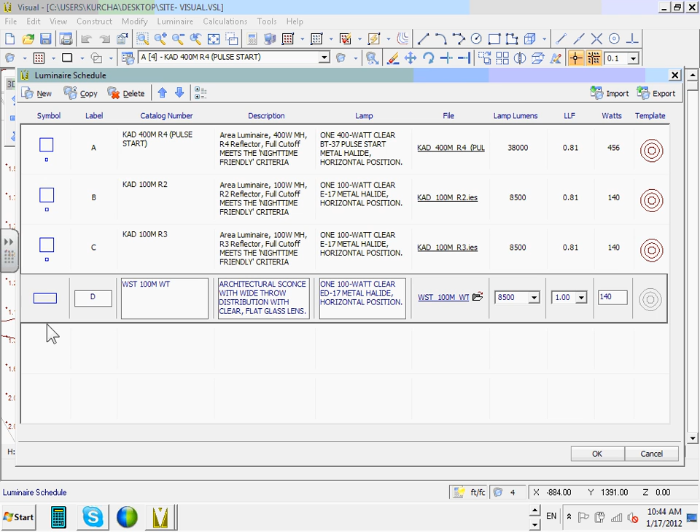How high are you thinking? 8 feet. 100 might be a little much, but it's a round number. Could probably get away with a 50 or a 70. We'll use 100. If you want on any of your fixtures that are directional, you can add the arrow. I like to do it just because then you know which way your fixture's pointing for your calc, and it kind of ensures it's correct. So I just add the arrow again like we did with our wall wash. Change that again.

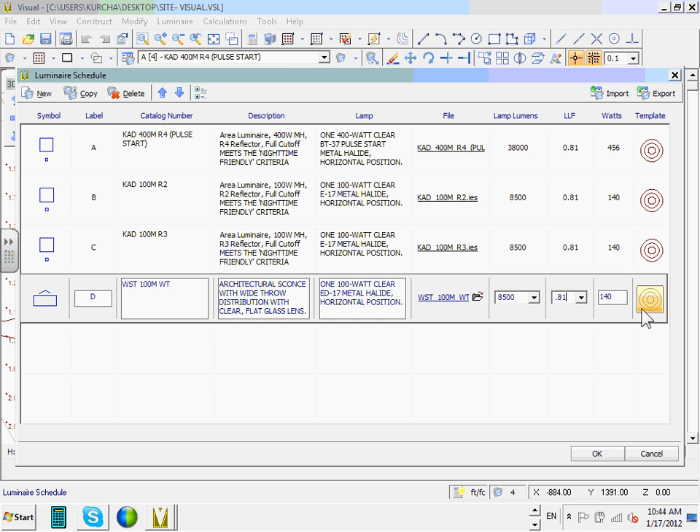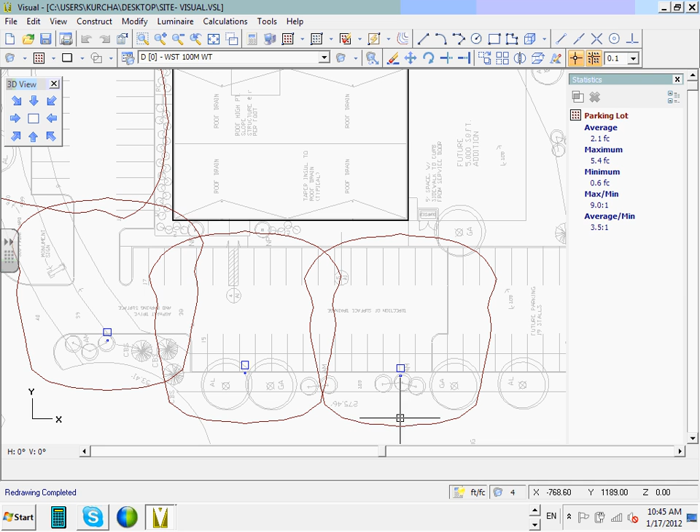If you want, you can turn your template on. That was that red line that was going around our fixtures. If you just use a half-foot candle, it looks like you got, did that one good? Yeah, because you got a half-foot candle minimum. What does the half foot mean? Right here. I'll show you. That red line that goes around our fixture right here? Yep. Anything inside that template is going to be a half-foot candle.

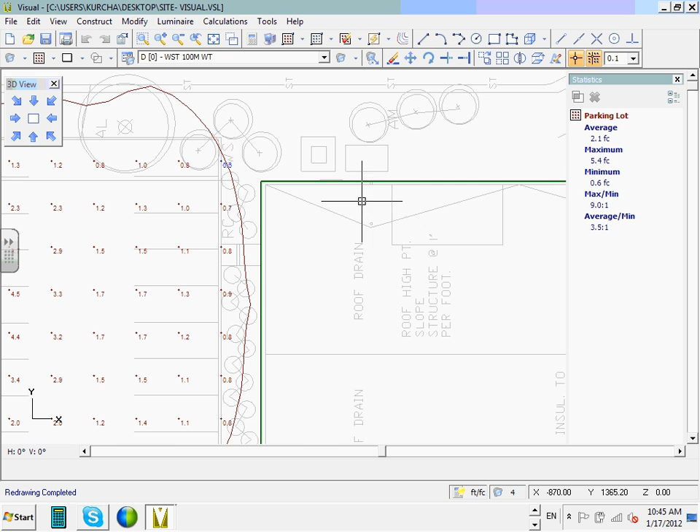So it helps, like we needed a half-foot candle minimum when we did our site. So you can see how everywhere inside of there we're meeting half-foot candle. Like right there, we're right on the edge of that line, and that's our minimum, our 0.6. So if it was right over here, we'd probably be at 0.4. That's right where the inspectors... Mm-hmm. But we'll probably pick that up a little bit once we add some perimeter lighting.

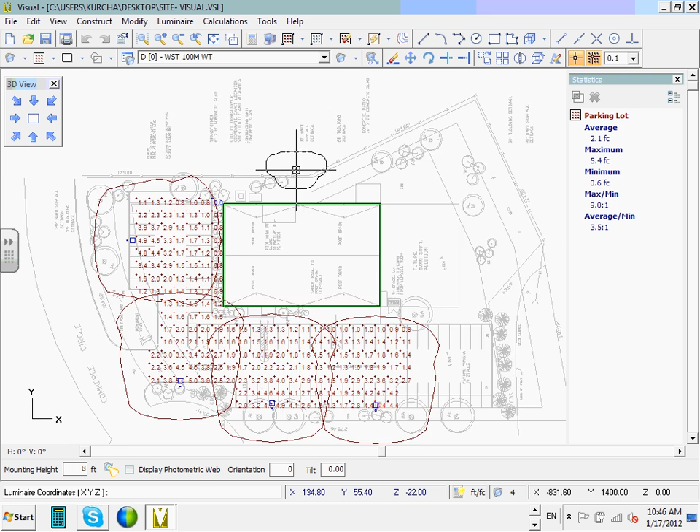Everybody, you guys got that fixture, right? So we're going to select it. No, we didn't drop it yet. Okay, so that should be WST 100M WT. So I selected it, hit place, and then we're going to use 8 feet, kind of common. And right now it's facing north, I guess. Yeah, we'll call it north. And these are just going to be perimeter, kind of go around the whole building. Around the whole building, yep.

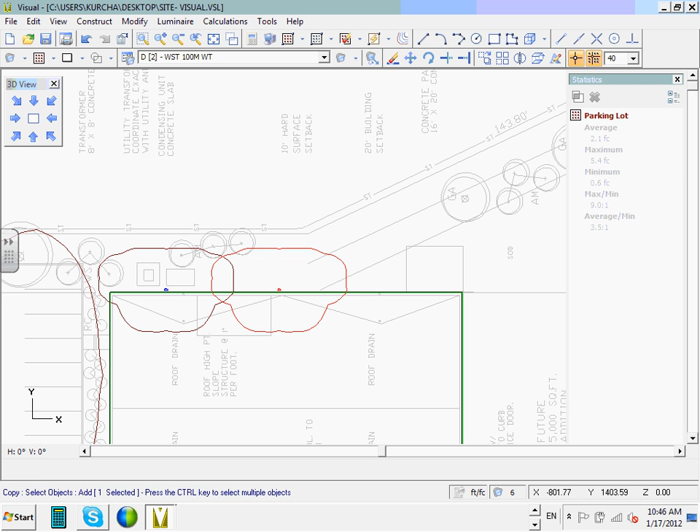So let's add one there, and then I'm going to change this to just one and try to figure out. It looks like you want a half-foot candle minimum around. We'll just go 40 foot on center. If we just move that back to 40, we can just do that. I'm just going to copy them down that wall, and I guess I'll center it a little bit better. It looks like we can get away with 3 on that wall. Yeah. Now you could either place these fixtures again at 180 and do the same thing, or there's a mirror function if you really want, and select right in the middle here. It'll add them.

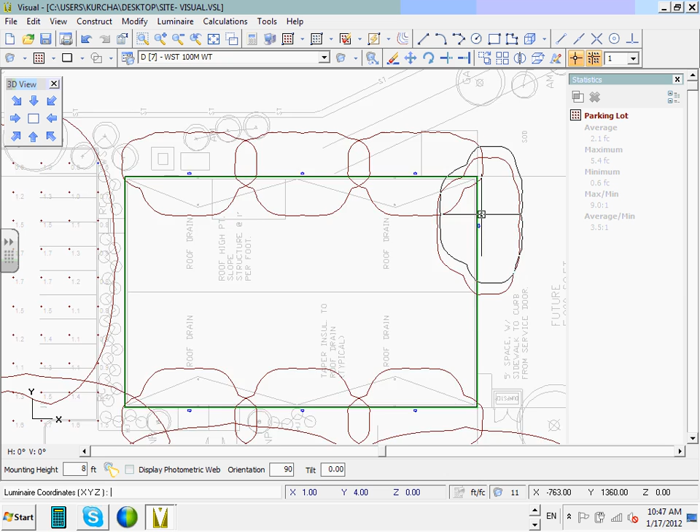These are wall lamps. The area within the red that's going inside the building, is this considered up and down, or? Yeah, that's a little confusing because it would cut it off. With these templates, it's just going to show, like we put this fixture in the middle of this room and tested it and drew a line on the floor, what it does, regardless if there's a wall there. Yep. Based on this fixture that you're using. So here's one fixture. Centered them again, and I'm just going to mirror this to the other side.

And then you start copying them. Okay. Make sure you guys are set at 8 foot and oriented appropriately. I don't know if they follow that. Did you guys get that? I just kind of mirrored it. I just took my one and mirrored it down, and then I did the same thing on the east and west walls. And that doesn't look too bad.

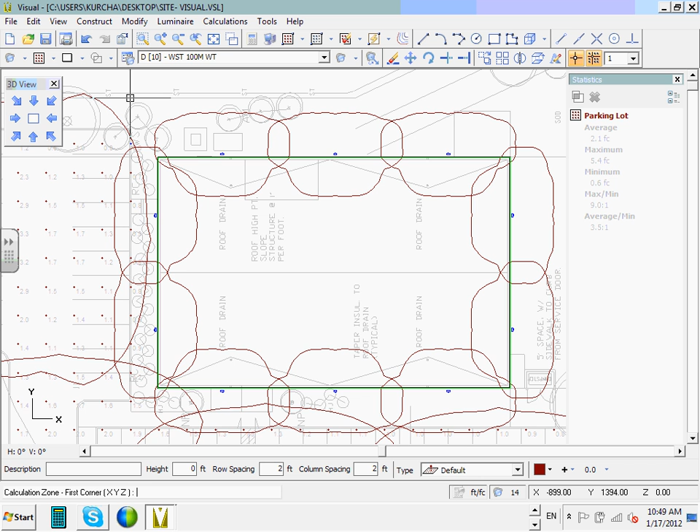Now, if you wanted, do you want to put a calc zone around the perimeter? Yeah, just for the heck of it. You could just do it. We'll do a rectangle. It's gonna be kind of goofy, but we'll just start up here and draw a rectangle down just past the dumpster, and it'll put all these points on there. So obviously we don't want to calc in this building. Under calculations there's a thing called mask. This is gonna let you take points off.

So we're just gonna use a surface because we have our building drawn. It's gonna ask you to select your calc zone down here. This will help clean it up a little bit. If you come under calculation, go down to mask. Did you draw your rectangle calc zone over the building like that? I'm gonna do a surface, and then select your calc zone that you want to mask. And then if you right click, it'll tell you to select your surface, which will be this. And it'll get rid of everything but your perimeter lighting.

That's a nice way of doing it. I used to draw it out. Or you could draw it all if you want. So we'll just start from the beginning. We went to calculations. We did a rectangle. We just started here, and I wanted to make sure my rectangle went equal around the building. You could label it perimeter if you wanted.

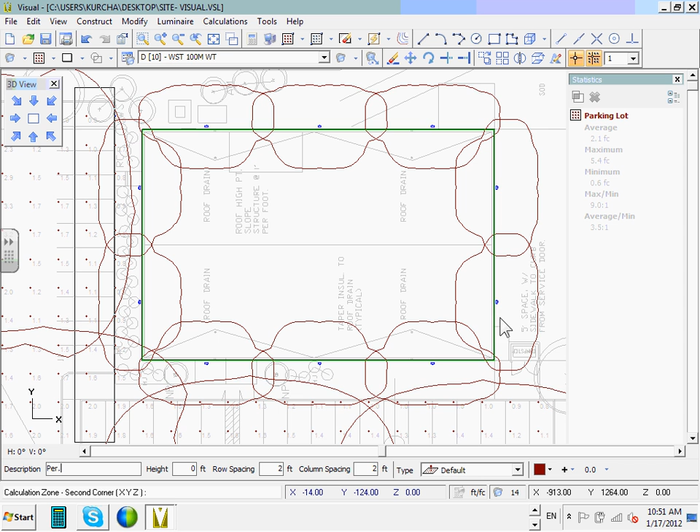It's at 0, 2 by 2. It's a little tight for your outside, because when you're calculating an exterior, typically the area is a lot larger, so your plan's going to be a lot larger, and if you use 2 by 2 it's going to be hard to read. So I just drew that calc zone in there. Then if you go calculations and mask, you could use rectangle and select your building again. But if you just select surface and grab your calc zone, right click, and then grab your surface and right click, it'll get rid of that. So you have to do it in this order, the calc zone, then the surface. Yep. Okay.

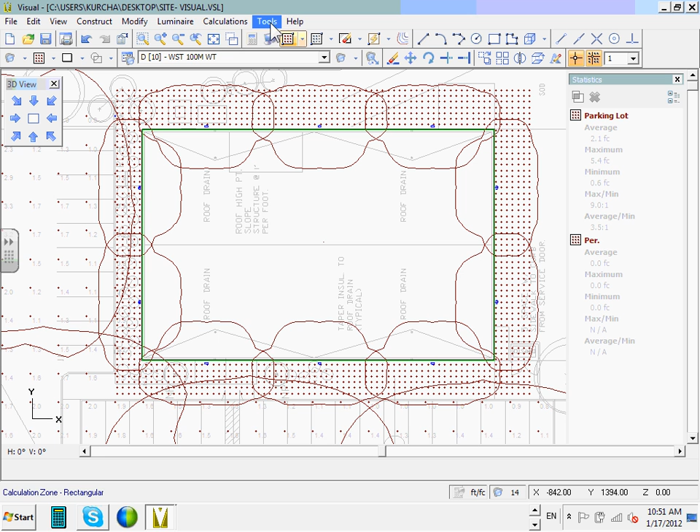See how it's hard to read? So you might have to adjust it. We could use 10 by 10 out here. The only thing is you're not going to get very many points. We only get 2, which is okay. You can use 5x5. Probably 5x5.

You're gonna go to calculation, mask, mask surface. Get on the green. What's the relevant calc spacing? Is it supposed to be 2? I think 5x5 works best. Makes it easier to read. The height and mask is 0, because we're doing it right at the ground.

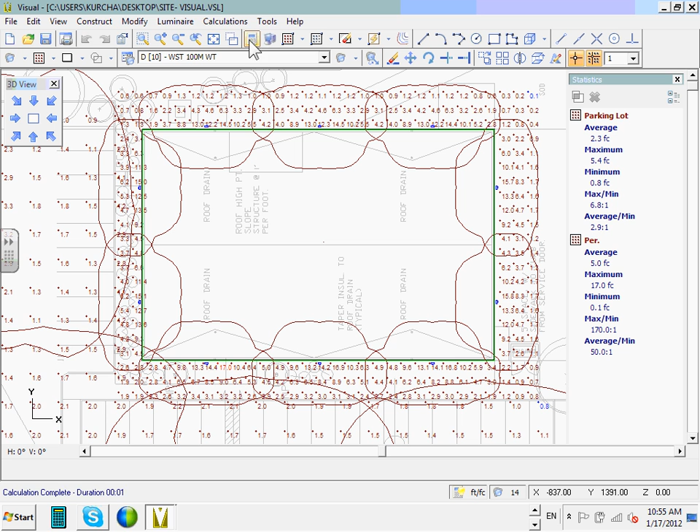Okay, the next thing is you calculate the box, and then right click. Now select on the line. A few clicks. Define reference. Are you good? This one? Yep. That's a really nice one. Kind of move your mouse around, just put them down. Any questions guys? Can we figure out how to make these larger? You might have to...